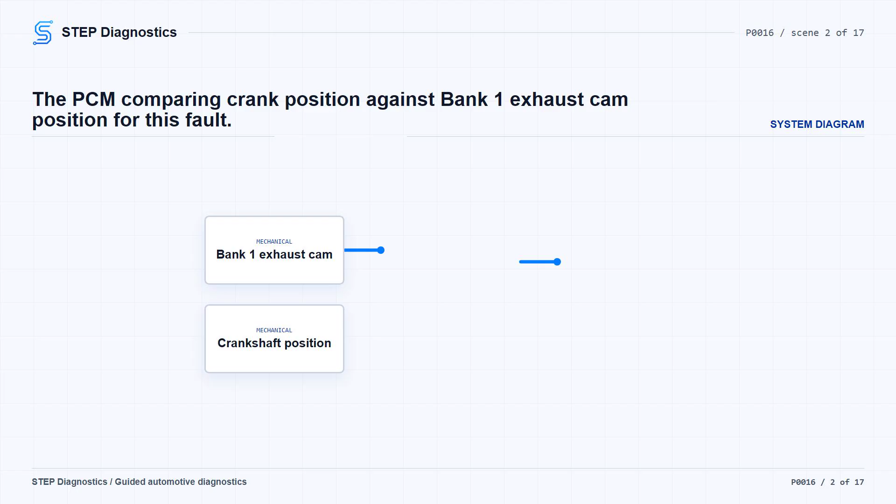The MIL may be on, and if the truck has stop/start, that system can be disabled while the code is active. The vehicle may run normally, or it may have symptoms tied to cam phaser control. Broadly, think about oil condition and oil pressure, VVT control, the oil control valve and solenoid, cam phaser movement, tone wheel alignment, timing chain hardware, and PCM control.

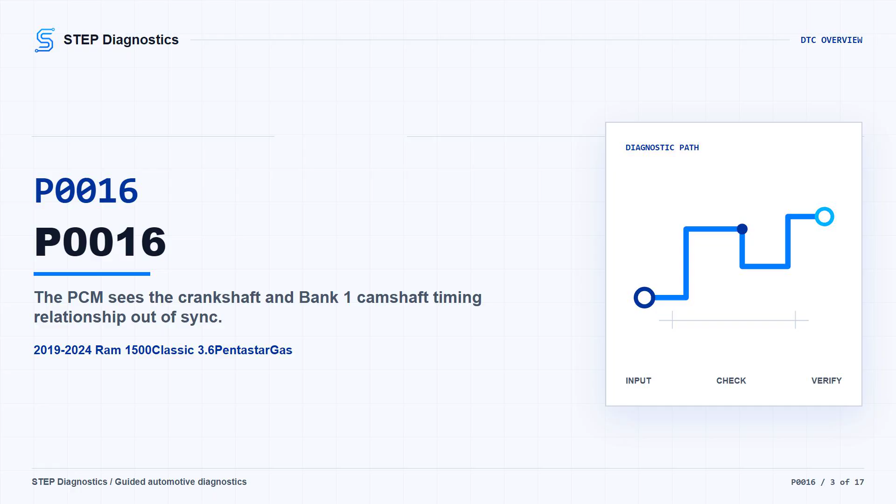A missing or erratic cam or crank sensor signal does not cause this misalignment fault by itself, so do not turn this into a cam or crank sensor replacement unless another fault path proves it. Treat the enabling conditions as monitor gates.

Battery voltage above 11.0 volts, engine speed between approximately 500–6,000 RPM depending on PCM calibration, engine coolant temperature above 10 degrees C, 50 degrees F. Engine oil temperature is above between 5 degrees C, 41 degrees F and 10 degrees C, 50 degrees F, depending on PCM calibration. And the camshaft has been driven to lock pin for approximately 3–4 seconds or more.

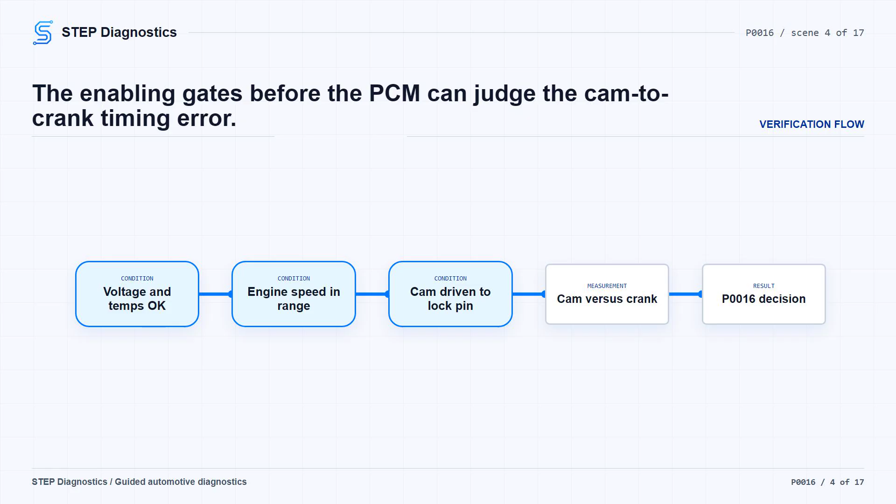The setting logic is the important part. The difference between the Bank 1 exhaust camshaft position and the crankshaft position is more than 10.0 degrees.

Start with the basic system checks and handle any applicable bulletins or case information before digging in. Turn the ignition on, read and record the codes and save the captured operating data. Clear the codes, start the engine and let it idle. If needed, road test it long enough for cam phasing to occur and for the fault to reset.

Then read codes again. If P0016 is active or pending, continue. If it is not active or pending, treat it as an intermittent condition and do not guess at parts.

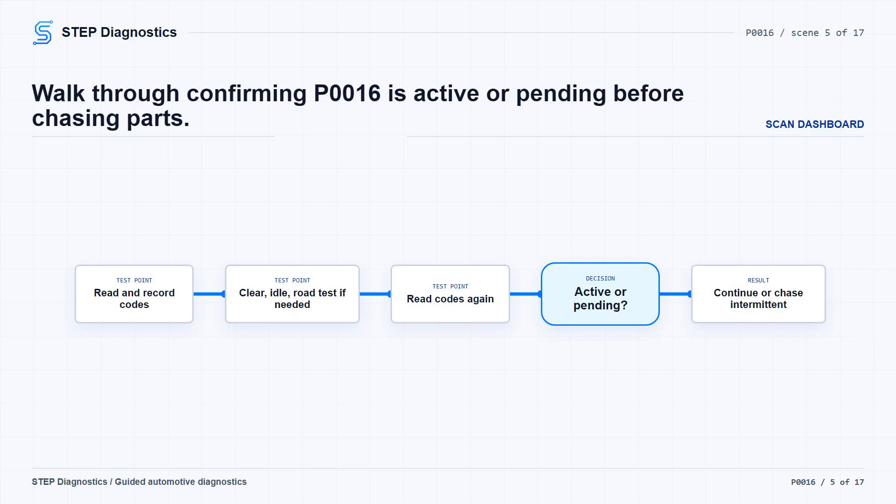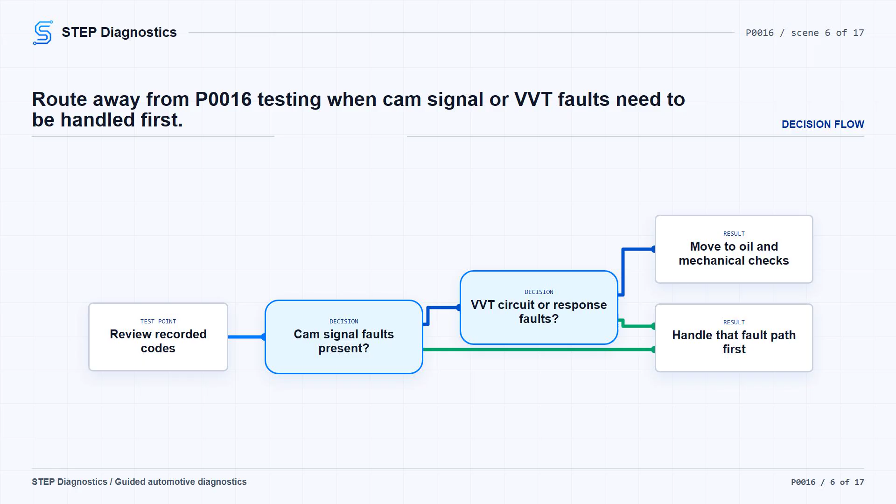Before testing the cam timing system directly, look at the codes you recorded. If cam sensor signal faults are present, diagnose those first before continuing with this P0016 path. Then look for active or pending VVT solenoid circuit open or slow response faults. If those are present, follow that applicable fault path first. If they are not present, move into oil and mechanical checks.

Before going farther, check the oil and the basic mechanical side carefully. Look for mechanical tolerances out of specification, oil pressure out of specification, low oil level, an incorrect oil filter that does not meet OEM specifications, dirty or deteriorated oil, contaminated oil, incorrect oil viscosity, and aerated oil. Skipping this check can lead you straight into a misdiagnosis.

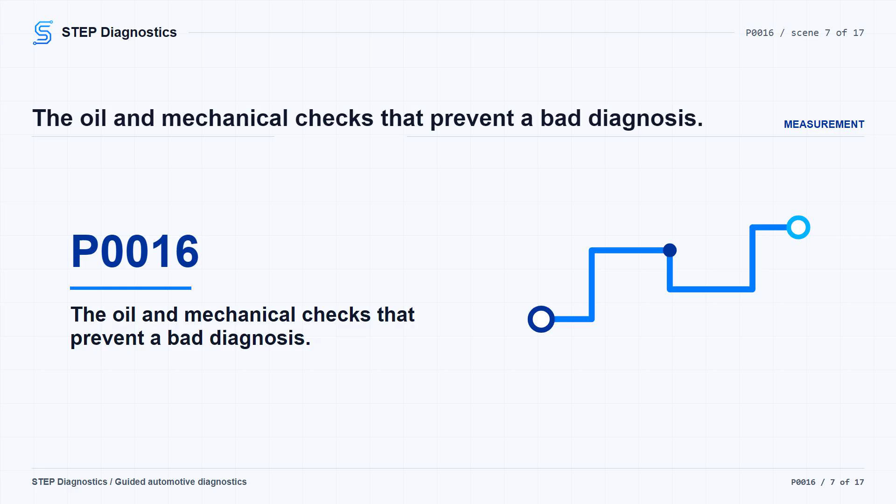If any of these conditions are present, repair the oiling or mechanical problem, such as improper oil drain back, oil sludge, a damaged oil pump, pickup tube, or seal, and then verify the repair.

If those checks pass, measure oil pressure with the proper oil filter cap adapter and a gauge, or monitor oil pressure on the scan tool if the adapter is not available. Start the engine, let it idle, and confirm the pressure is stable and above 14.0 psi. If oil pressure is below 14 psi or oscillating excessively, it can delay cam phaser movement enough to set a slow response or cam/crank misalignment fault. If the reading is not stable and above 14.0 psi, repair the oiling or mechanical condition and verify the repair.

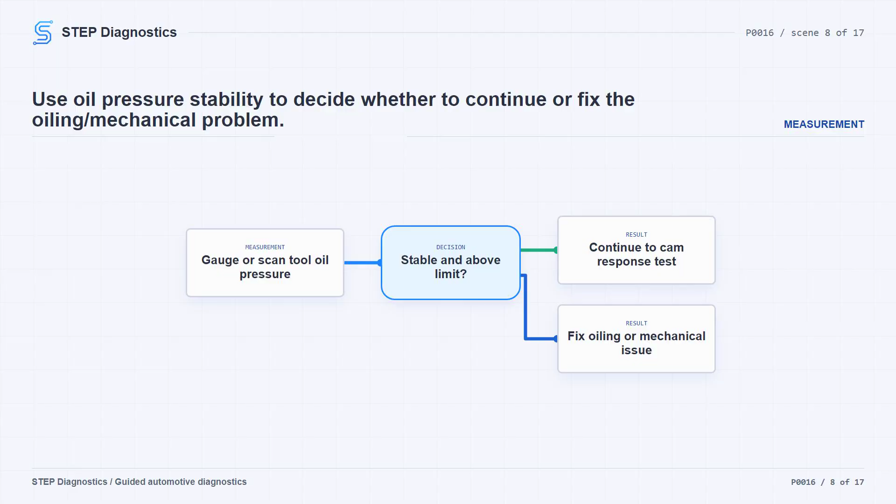Now verify the active condition by watching cam phaser position. Start the engine and let it idle. On the scan tool, compare exhaust cam 1 actual position to exhaust cam 1 desired position. Compare them at idle, then at several different engine speeds.

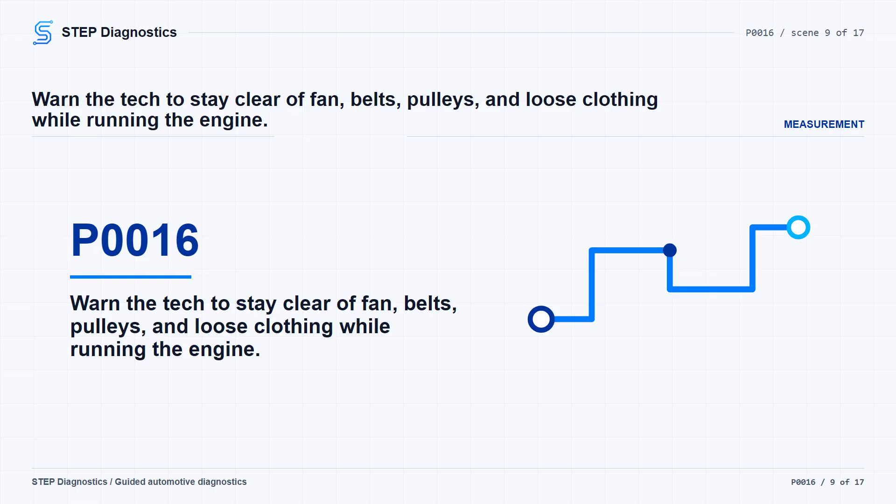Raise engine speed quickly and hold it steady for up to 30 seconds. Then lower engine speed and hold it steady above idle, off the lock pin, for up to 30 seconds. Repeat that several times. Then let the engine return to idle while watching whether the actual position returns to lock pin.

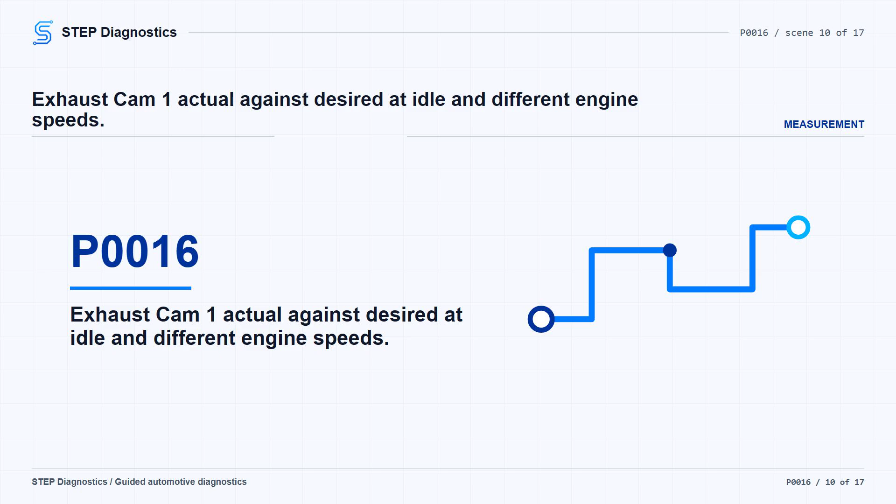You are looking for three things: the phaser not returning to lock pin at idle, actual position moving slowly compared to desired, or actual position lagging and then overshooting desired. If actual and desired differ by more than 10.0 degrees at idle, go into the electrical versus mechanical split. If actual position lags or overshoots during speed changes, treat that as a binding or sticking condition and go to the oil control valve and solenoid checks. If neither condition is present, move ahead to tone, wheel, and timing checks.

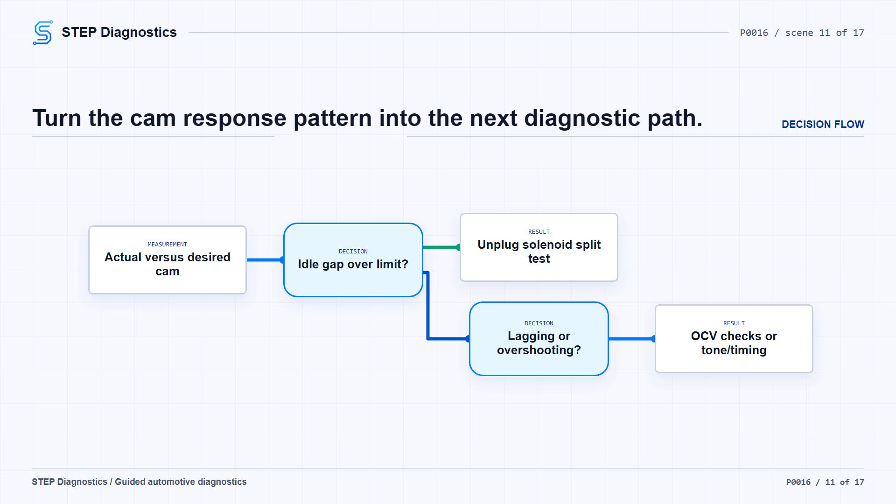Keep in mind that a slow response fault can take approximately 30 seconds to fail, while this misalignment fault generally fails within 5-10 seconds. If the idle difference is more than 10.0 degrees, leave the engine idling and disconnect the camshaft 1/2 position solenoid connector.

With the solenoid disconnected, exhaust cam 1 actual position should change to lock pin. The exhaust cam position should be at approximately 117.0 degrees at lock pin. If the value changes to lock pin, check the K276 VVT exhaust control 1/2 circuit for a short to voltage.

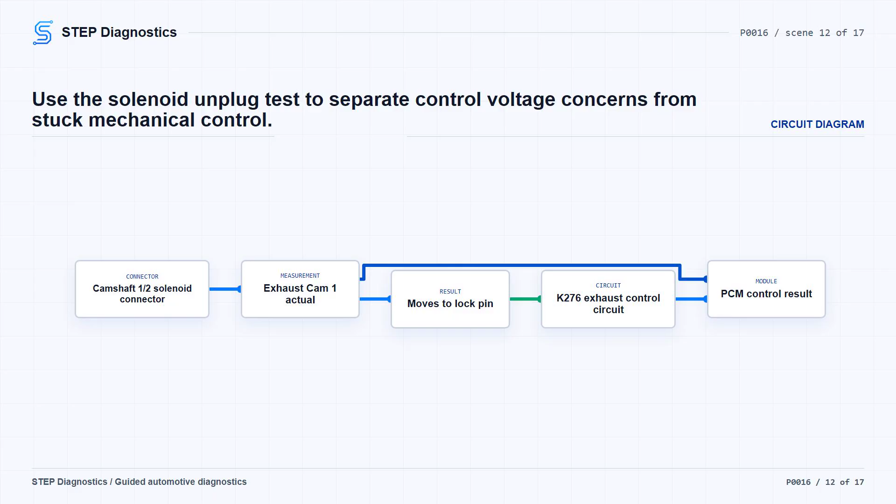If that circuit is not shorted to voltage, PCM replacement is the supported result, followed by repair verification. If the cam value does not change to lock pin with the solenoid disconnected, continue to the oil control valve check. With the ignition off, remove the camshaft 1/2 position solenoid and inspect the spring-loaded spool valve on the oil control valve. At rest, the spool valve should be flush with the surface of the oil control valve.

Push and release it against the return spring with a small punch. It needs to move freely without dragging or sticking. Debris or a small metal chip can sometimes lodge in the oil control valve, stick the spool, and then dislodge later, leaving an intermittent cam/crank misalignment condition.

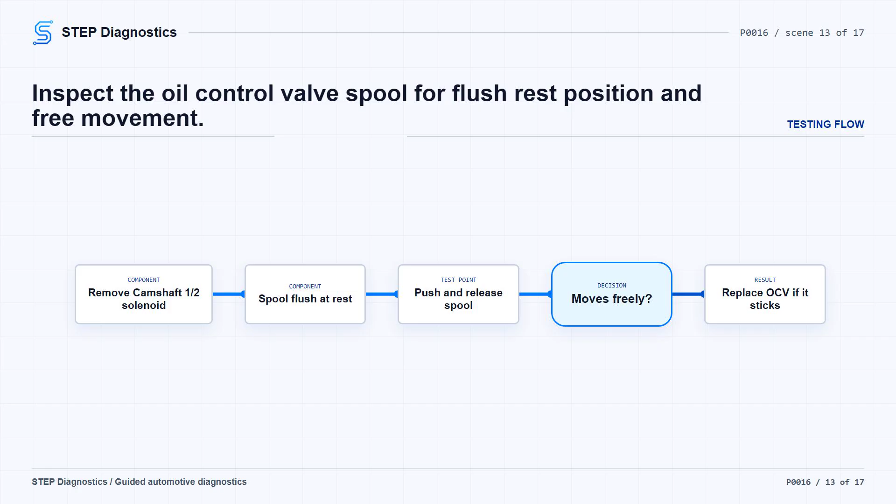If the spool valve is not flush or does not move freely, replace the camshaft 1/2 oil control valve, perform the cam/crank relearn procedure, and verify the repair. If the oil control valve passes, keep the solenoid removed, reconnect its harness connector, turn the ignition on, and use

the scan tool to actuate the camshaft 1/2 position solenoid on and off several times. If the solenoid binds or sticks during actuation, replace the camshaft 1/2 position solenoid, perform the cam/crank relearn procedure, and verify the repair. If it moves freely, swap that solenoid with the camshaft 2/2 position solenoid.

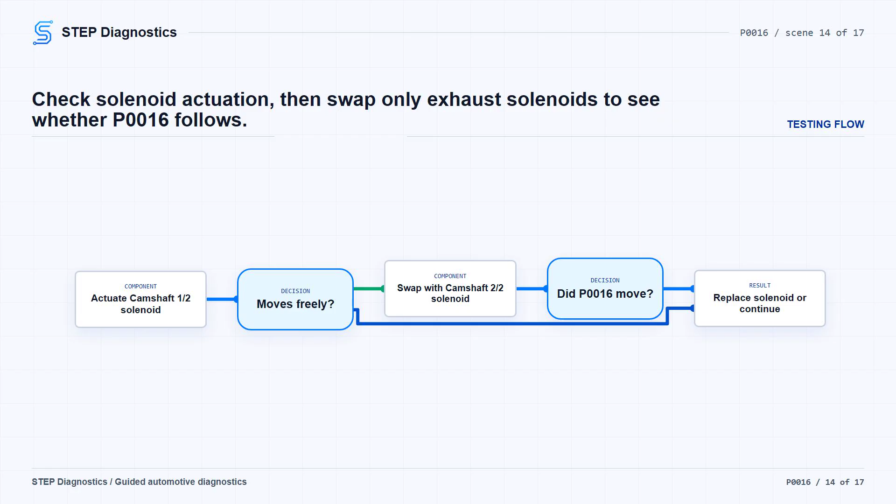Do not interchange intake and exhaust solenoids. Reconnect the harnesses, clear codes, and road test under the same conditions that set the fault. If P0016 moves with the solenoid, replace the faulty camshaft 1/2 position solenoid, perform the cam/crank relearn procedure, and verify the repair. If the fault stays with the original camshaft, continue to tone wheel inspection.

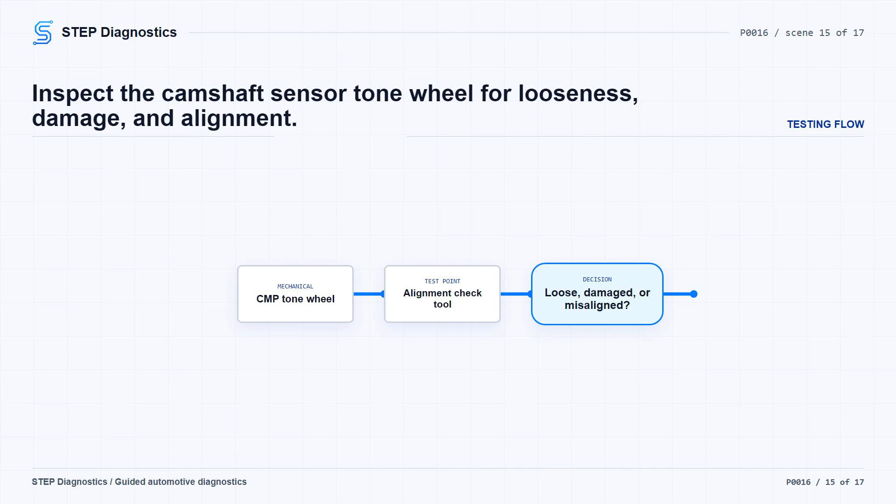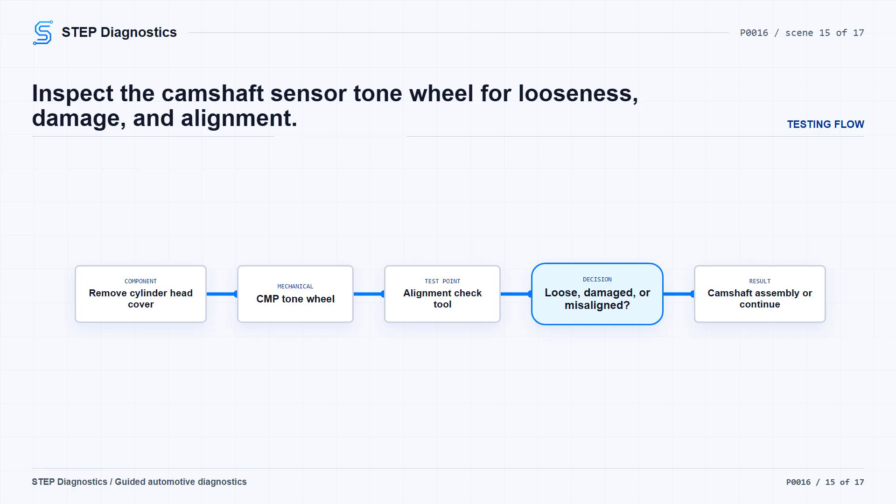If the tone wheel checks good, verify timing chain and gear alignment, and inspect the timing chain tensioner and guide for faulty or broken components.

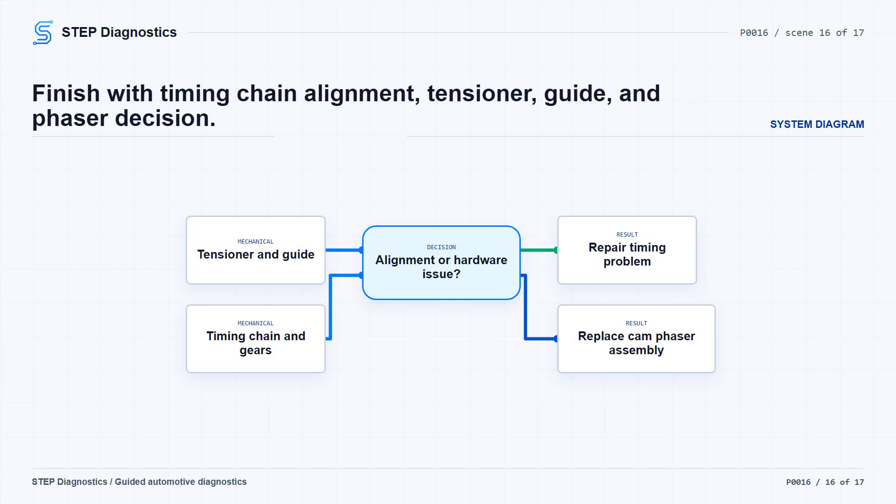If timing alignment or timing hardware has a problem, make the appropriate repair and perform the cam/crank relearn procedure. If no timing alignment or component issue is found, replace the cam phaser assembly, perform the cam/crank relearn procedure, and then verify the repair. Keep verification separate from testing.

Anytime this path calls for a repair, clear the code, perform the required cam/crank relearn procedure when called for, run the vehicle under the same conditions, and confirm P0016 stays gone.

The takeaway is simple. Prove the fault is active, rule out related signal and VVT faults, verify oil and mechanical health, compare desired versus actual cam position. Then split the problem between control, sticking hardware, tone wheel alignment, timing hardware, and the phaser.